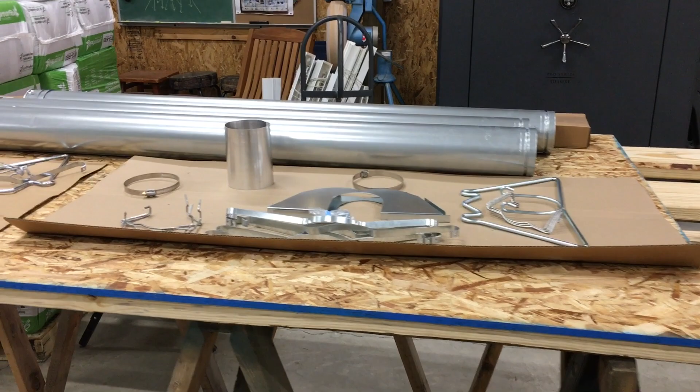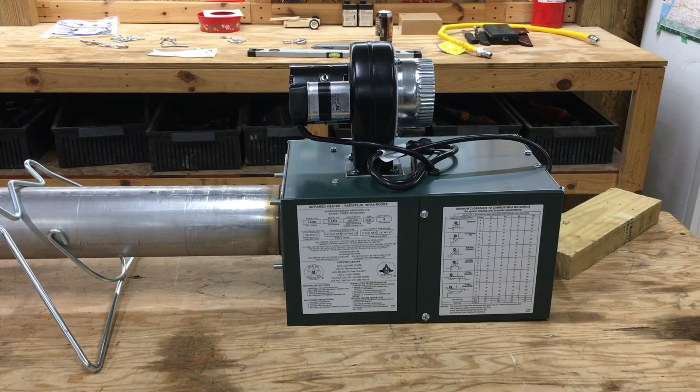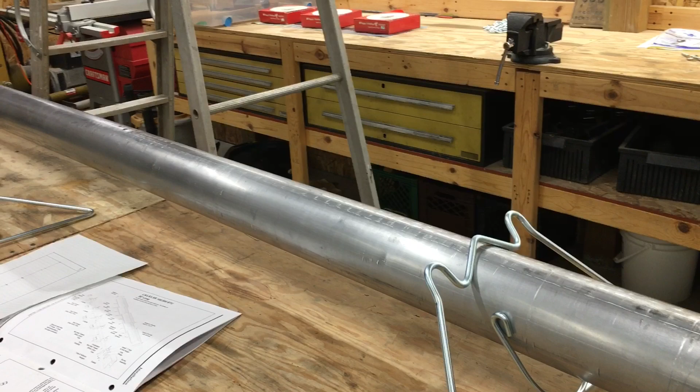Okay, we're going to start by showing you some of the components that we have. First of all, let me back up over here. This is the burner assembly for this particular heater, and it's not very big. It's probably, I don't know, 14 or 15 inches long, and that motor on top actually is a combustion air blower. And then these tubes hook on here, and there's 5 sections of tube in this one, making it 50 feet long. And this one happens to be a 100,000 BTU output, BTUs per hour.

And that is slightly undersized for this building, I think. However, we're gonna see how it works. And I don't need to keep it 80 in here. I just need to keep it 40, 50, maybe 60. But there's the 5 tubes. And in addition to the 5 tubes, we've got all the hanger pieces. So that's an example of one of the hangers. We'll show you how these all go on as the video progresses.

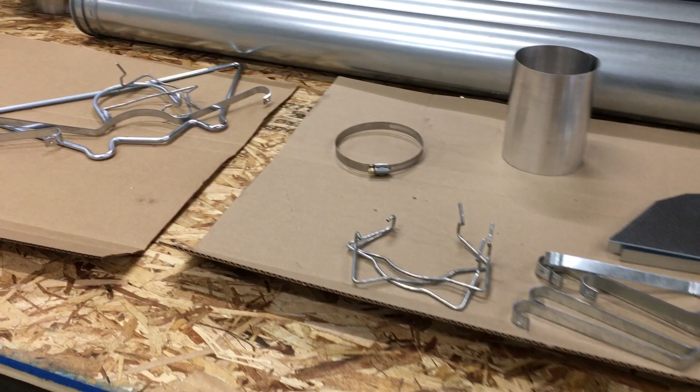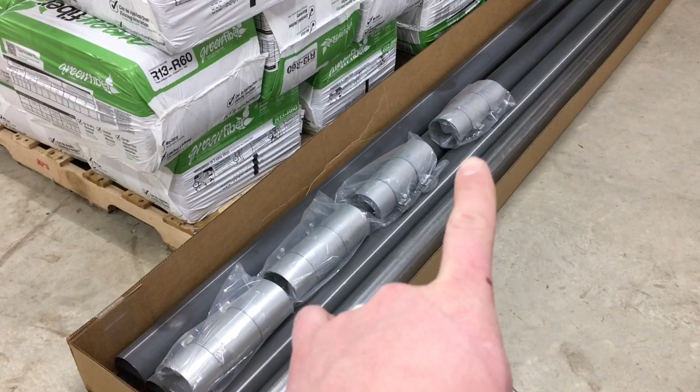And there's adapters to get to the B-vent piping, and I've got some cap here and a thimble to go through the wall for the venting. Over here in this box I have the reflector shields, and I'll show you how all of this stuff goes together here in just a minute. But I want to show you all the components. Here's the rest of the tubes, and each one of these pieces here is how you connect the tube sections. And we'll show you that also.

So Marcus and I are going to show you how much insulation we bought for this building. I want to put 12 to 14 inches of blown in insulation in the top of the building. And I had Marcus stand there next to it so you can see how big the stack is. There's 120 bundles of blown in insulation here, and there's actually some more over here, another pallet over there. But we're going to do that on another video.

We want to go ahead and get this heater hung in case we need to get in the attic for anything. I don't think we will need to, but in case we need to get in the attic for anything, we don't want to have to work around all that insulation. So just wanted to show that, because that's coming up in a video pretty soon as well.

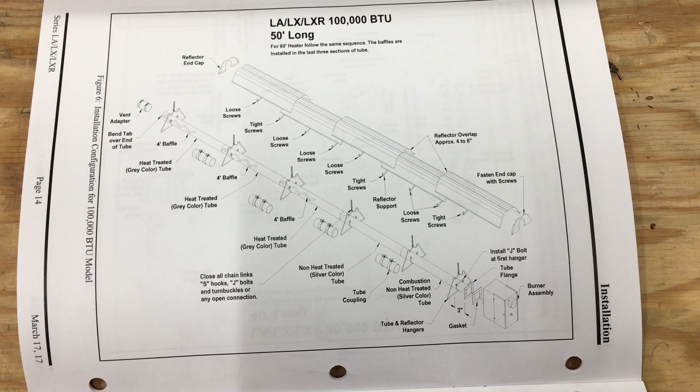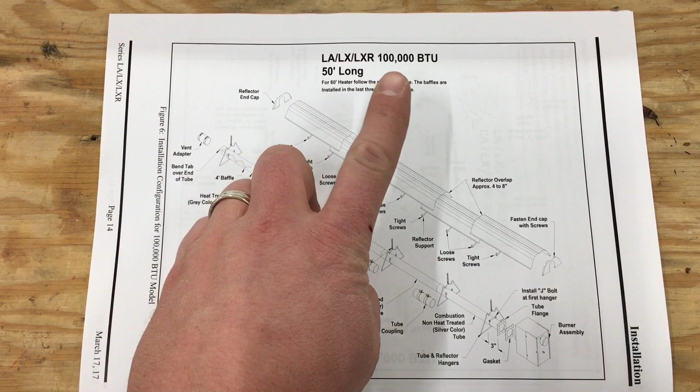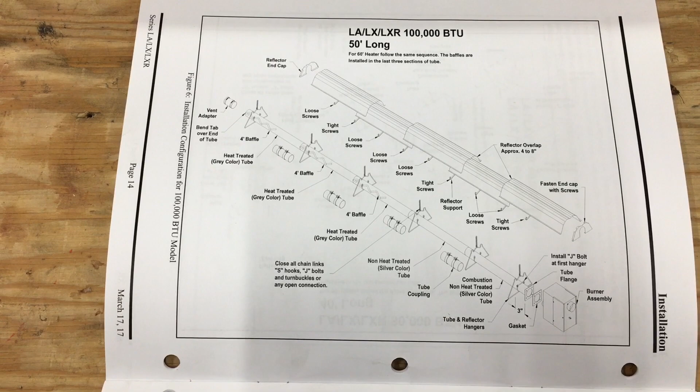So I'm going to take a minute here to tell you why I chose the heater that I chose. This is probably the only low clearance model of a tube heater that I could find. It is by Superior Radiant Products, and it is the LA 100,000, 50 feet long. And most of these tube heaters require a clearance from combustibles of like 80 some inches, 84 inches, which means you need a pretty good tall building to put one of these things in.

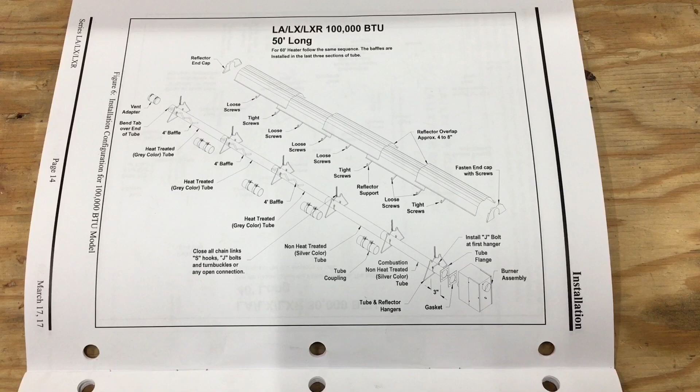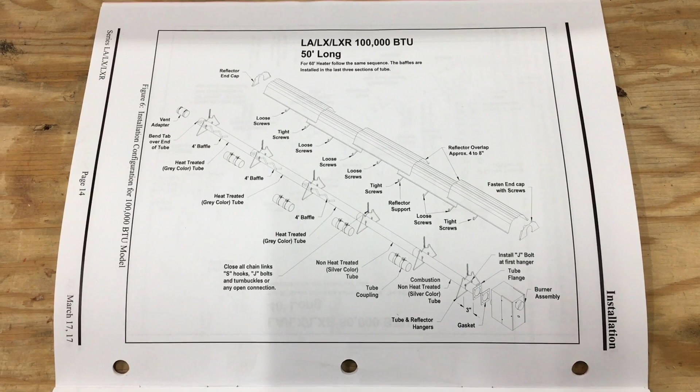However, we have a 12-foot sidewall on this building, which means this thing's going to be hanging up about 11 feet in the air. So the clearance to combustibles directly under this one is only like 32 inches or something like that, which means I can park vehicles in here and the canopy of my tractor, and I don't have to worry about anything melting or any of that stuff, because this thing dissipates the heat through the whole 50 feet, and it should not be an issue.

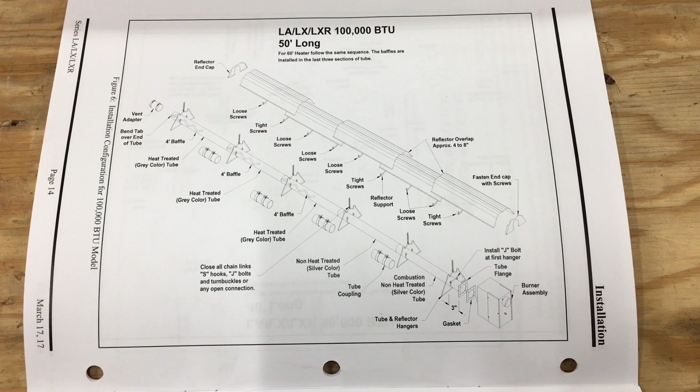What you have in front of you here is the layout of how this thing goes together. And since I've had it on the screen for a minute, I won't stay there. But you can look at that, pause the video, and take a peek at how that's all gonna work. Right now, Marcus and I are in the process of installing the hangers, and the hangers are going to go up just like that, and I'll show you how we're putting this together right now.

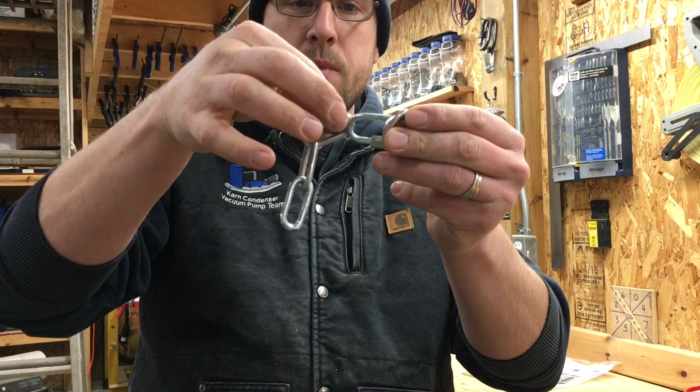Alright, here are the components that we're using. I went to the local home improvement store and I bought several items that we're going to use to hang these things. I bought a length of chain, and I don't need a tremendous long length of chain because I want this thing mounted high up to the ceiling. But I bought these lag style hooks to go into the bottom of the trusses. I bought these connector links to hook to that, then to the chain, then to one of these clevises. I needed the wider gap right here to be able to get the hanger in there.

So what that looks like, all put together, is just like this. Can you see that in the camera, Mark? So this is where the ceiling's going to be, and you'll have this hung down here. And I have adjustability. I can move this up to the next link if I have to get that tighter up to the ceiling, because I want it as high up to the ceiling as I can, because as this radiates heat down, it's going to radiate heat at an angle. And the higher up I get, the wider that angle is when it hits the floor.

The shorter I am, or the lower, closer to the ground I am, the narrower that band is, and it won't heat the entire concrete pad. So we want to get it up as high as we can, and we'll have the best opportunity to do as much heating in this building as we can.

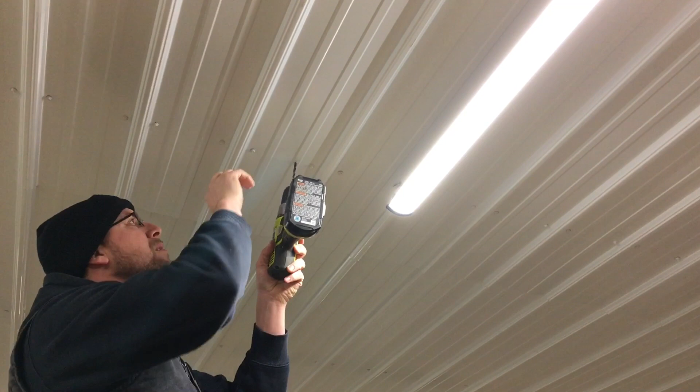All right, we're going to find between two screws that we put in. This should be right where that truss is at. And we're just going to follow this particular rib all the way down the ceiling from one end to another. That way we know we're straight. And we're going to go right in the middle of it here.

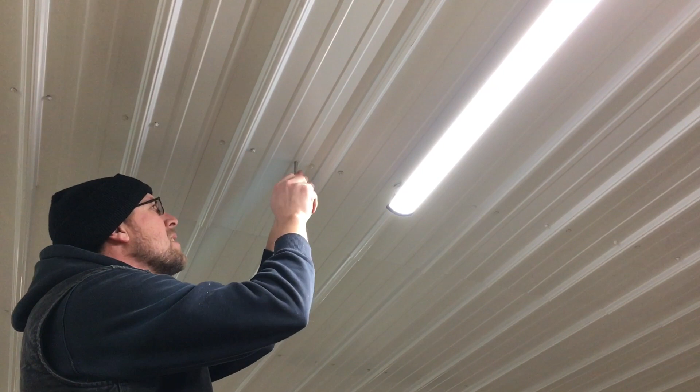Get our hole pre-drilled. We'll take our hanger assembly. Get that started by hand. And then we've got a large screwdriver. We're just gonna drive this thing right in where it needs to be. Go ahead and pause, Mark.

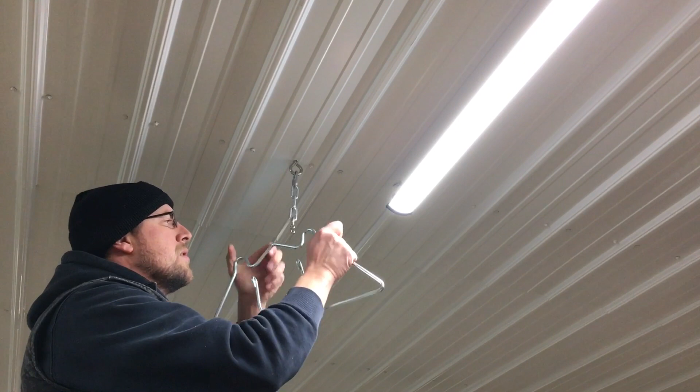So we're gonna get this thing tightened up here. And in order to get the hanger to hang in the right spot, we're going to have it be this way to the building, so that the hanger can sit in here in the right direction. We're just going to slide this thing in here, put our bottom part of our clamp back in here. That should hang right there, lined up with the other one, and ready to go.

So we're going to get the other 4 of these put in, and the next segment we'll show you putting the first tube up. Okay, so we're ready. We have all of our hangers put up. Now we're going to put the first section of tube up. This is the flanged section of tube that hooks to the burner.

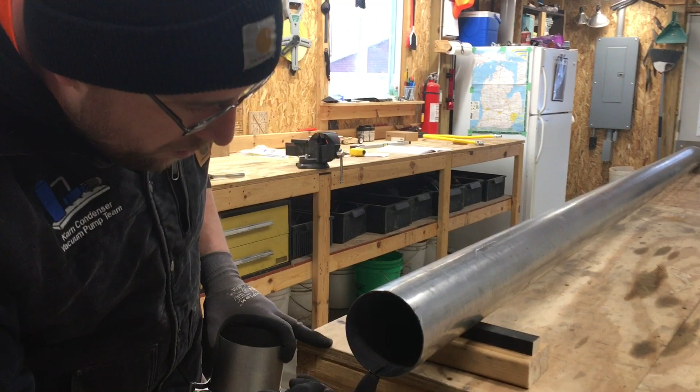So the first thing the instructions say is there's a welded seam here. Michael, see if you can zoom in down here just a little bit. You can see where this tube is welded, and the seam weld right here has to face down. There's a shield on the other side of this tube that has to shape like this. It has to kind of have the open side being down, and that welded seam has to be down.

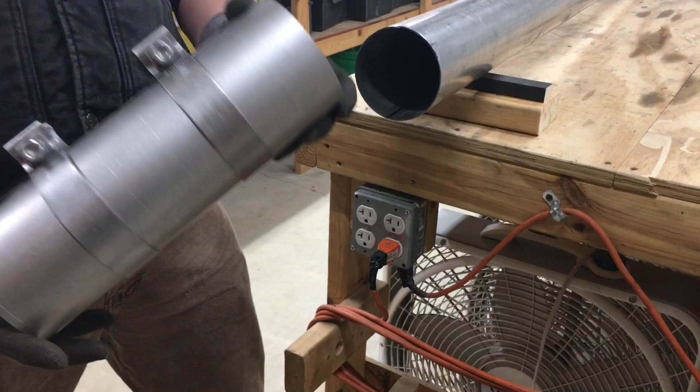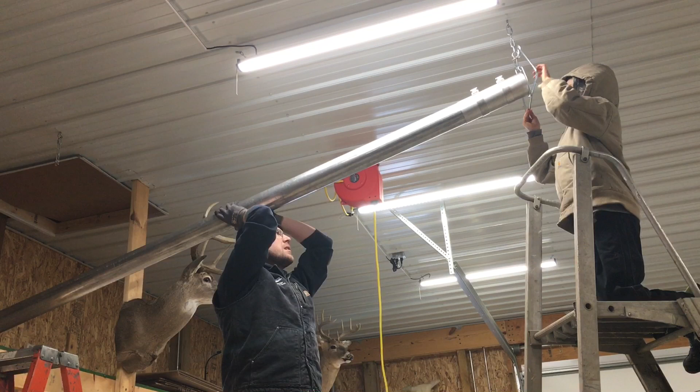Next thing is, before we put this up there, we're going to put this coupling on. This is how we're going to get the other piece. So when we hang this, the other piece will slide right into here, and so on. So that's how we'll put these together. You might have to grab onto that tube thing and spread it apart with your hands. Slide it over. Keep working it forward. And push it forward at the same time.

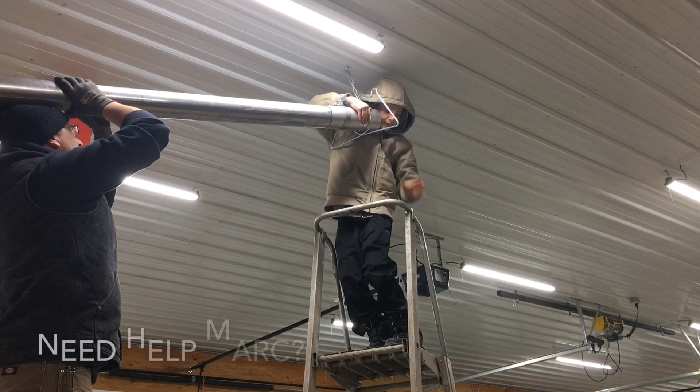You're going to get on the ladder and hang that one as we get to the end of it. Oops, I got jogged over here. Hang on. Yeah, you need the bolt of the clevis to be down. Is that what that's called? Is it clevis? Yep. I think so. So now.

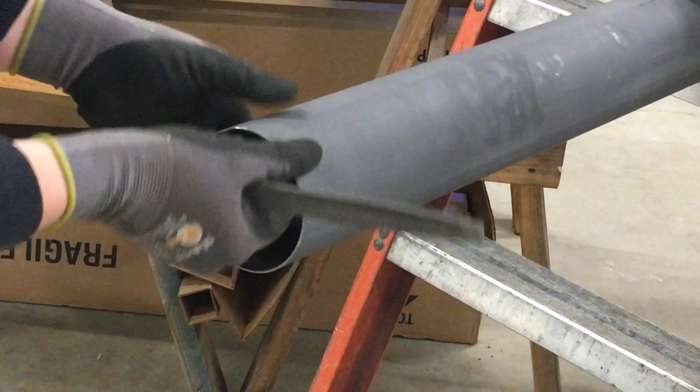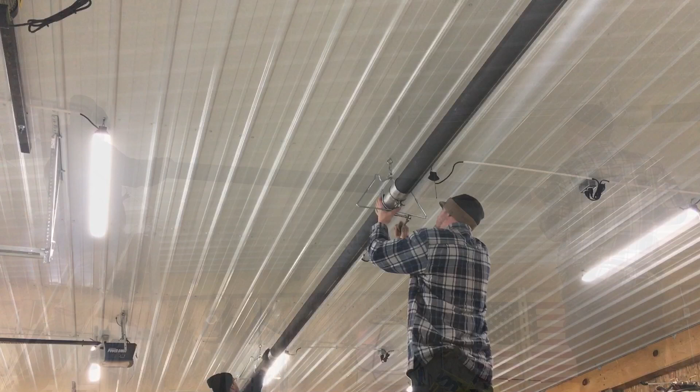All right, so we've got the tubes hung, the hangers up, and the tubes all in, all the way to the other end of the building over here. So the first 2 lengths are a little bit different metal. They're more protective against the flame. And the last 3 sections all have a baffle in them to dissipate the heat a little bit better.

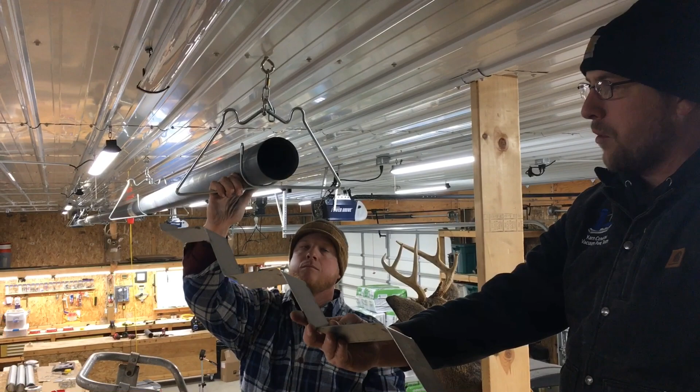And now I'm gonna hand the camera to Marc up there, and we're gonna put a little cap, or I guess an adapter, on the end here for our vent. So this is what these baffle pieces look like. They're about 4 feet long. I don't know, maybe 3 feet long. But you just stick them in the end of here, and you bend the tab over, and it just kind of holds it in place there and keeps it from moving. And on the rest of them, the next coupling for the next tube slides over to hold it.

On this particular one, we're just gonna put this adapter over here. Seam on the bottom with that too, I would imagine. Yep. Something like this. And we'll throw a clamp on here, which they provided for us. I should have grabbed my drill to do this. But anyway, we're gonna tighten this up, and then we'll be ready to attach a vent to this at the end.